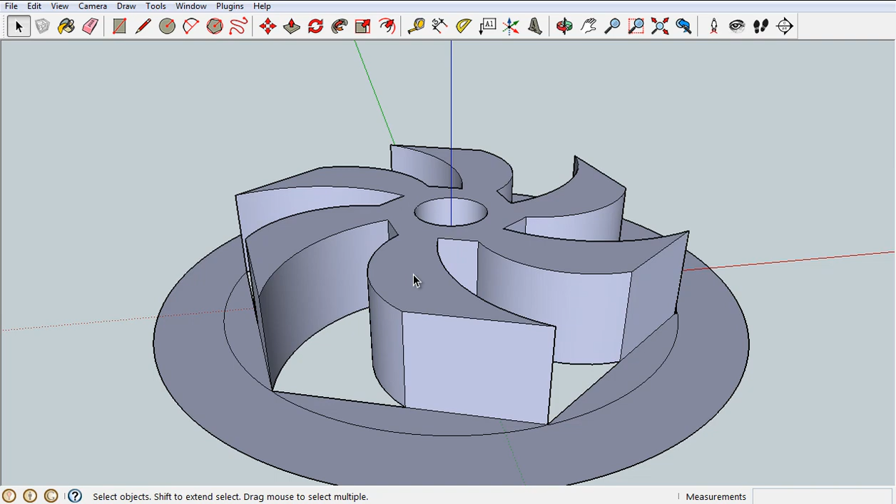If you triple click on any part of your model, so 3 clicks kind of quickly, 1, 2, 3, it selects the entire model, and you're just going to right click and go to reverse faces. You want to be seeing white or gray pieces on the outside, and if you look at the inside of your model, you should be seeing those blue pieces on the inside.

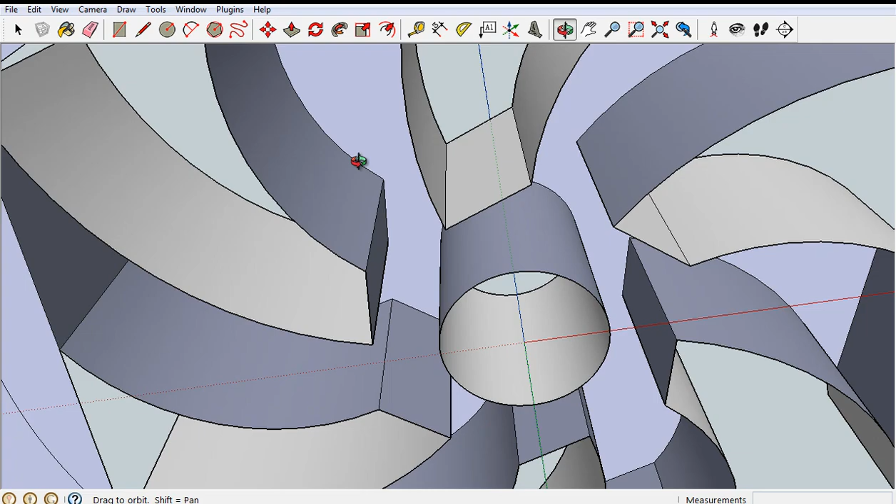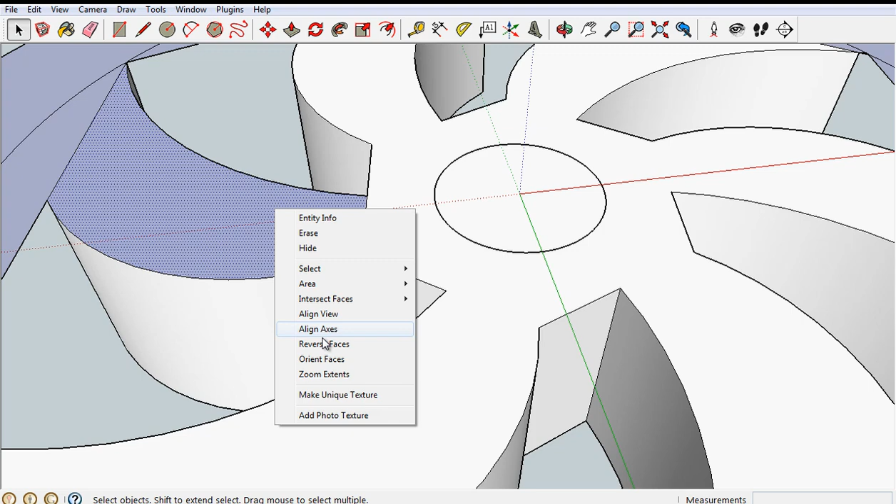Now this is something that has happened to me a lot as I've been working on creating wheels, where one whole face or one whole side of the wheel disappears. And that's usually pretty easy to fix. You can just close up any one of the openings by drawing a line across it, and that should create a face then for the rest of it. Again, you can see it's blue, so I'm going to reverse the faces and click over here on this one and reverse faces, and then you can erase that line.

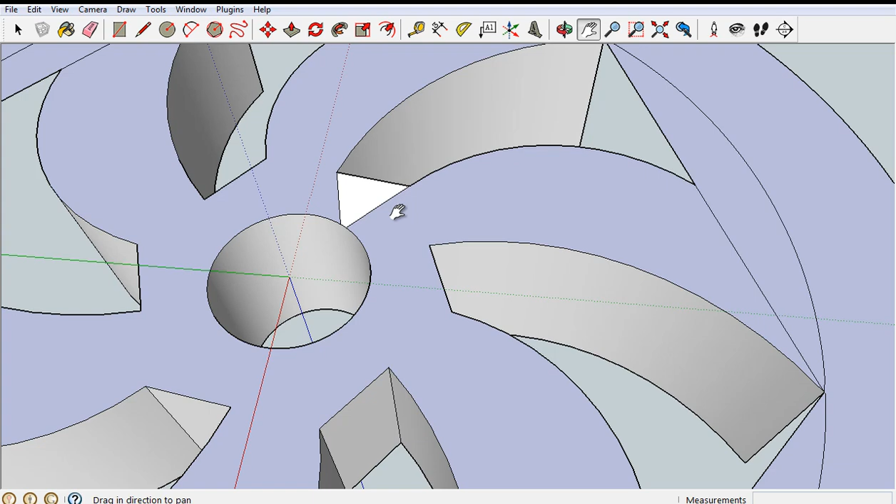So I was having some issues with this being one entire face, which means I can't open up this axle opening, because if I click on it and delete it, it again erases the entire face. So I tried just drawing a line from there out to one of the corners, and that didn't close it. But then drawing a second line from a corner back closed it up and left that center open. Then you can always go back and erase those lines, and it should still be one face. So sometimes you just got to kind of play around, try it again.

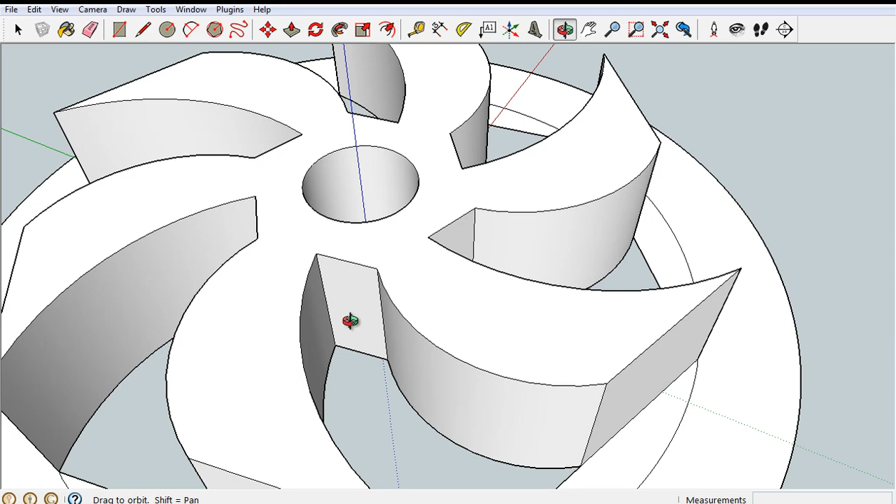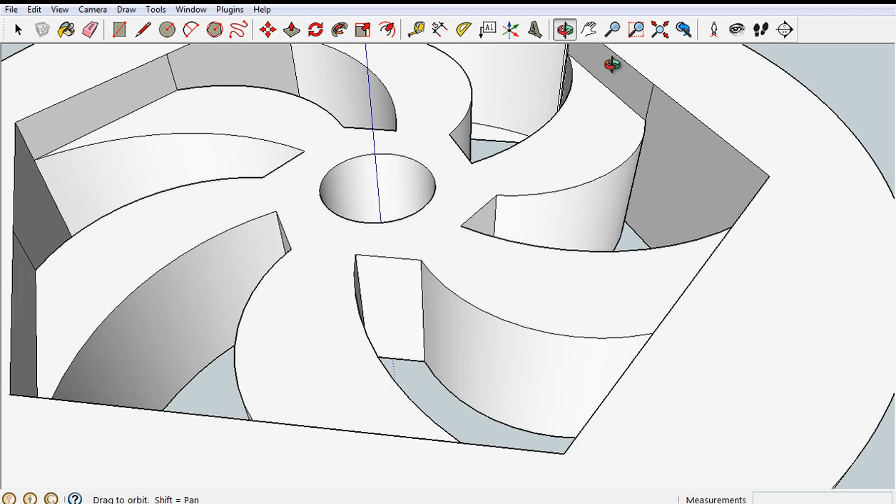But this now is getting a little bit better, where I've got external faces on my spokes and my center hub. I would need to do a little bit more work to bring up the tire, but you can see it wouldn't be too difficult if you just erase these lines here probably, and then raise this up. I like to sometimes go even higher than the spokes. This wheel was supposed to be 7 millimeters tall, so I can check that and measure from the bottom to the top. You can see we're at 5.4, so I'd actually have to go up 1.6 more. So I can just do that real quickly by pushing this up 1.6.

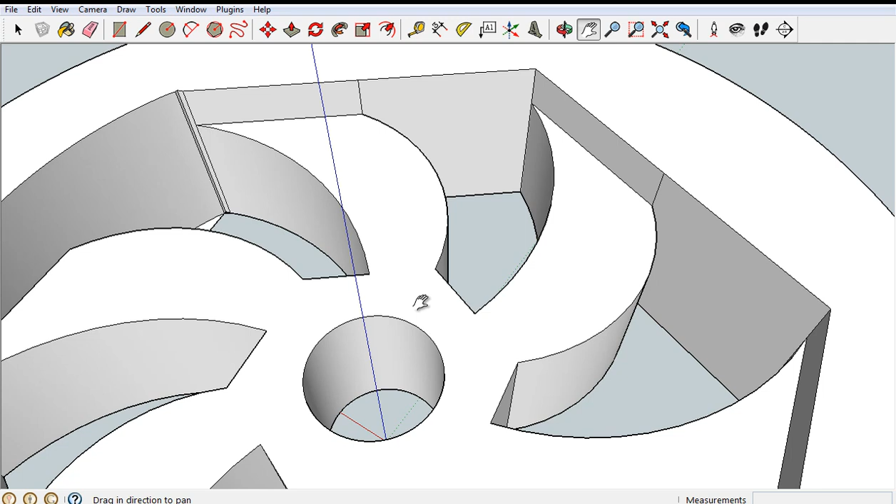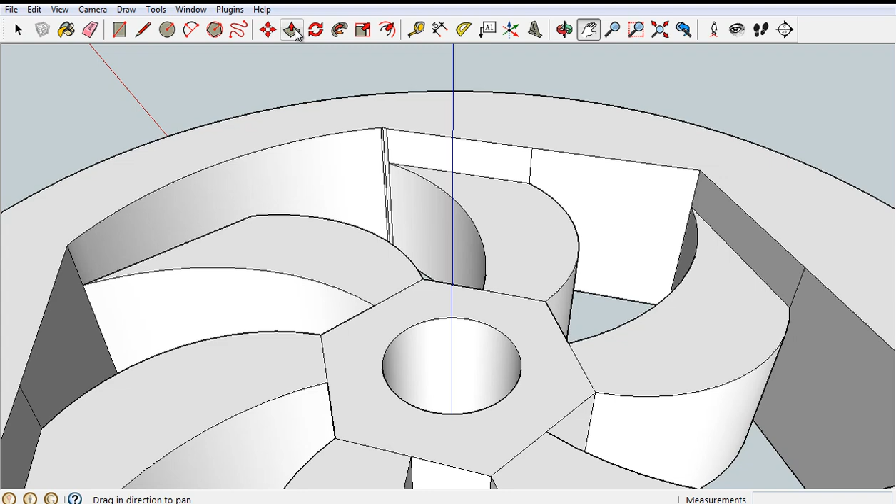And this is where you then start working on your hub. I can close this off just by connecting these lines all the way around. And then you want your center hub to actually go slightly higher than the rest of the wheel, so that there's not a lot of friction between your wheel and the body of your car. So I'll bring this up slightly more than the rest of my wheel, so that when this connects to the car, this is the only surface that actually rubs on the car, and that should help it roll a little bit faster.

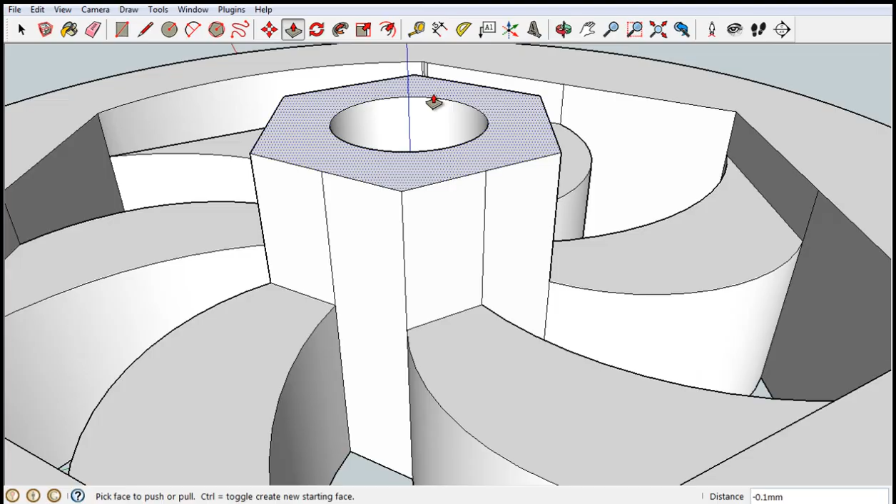So this would actually be the measurement that I'd want to take to make sure this wheel is going to fit in the car well. It was supposed to be a 7 millimeter depth, and so measuring from there to here, you can see I'm at 7.1. So if I wanted to be picky, I could just push this top surface back down 0.1 millimeters, and then that should fit right in the wheel well opening of my car that I made.